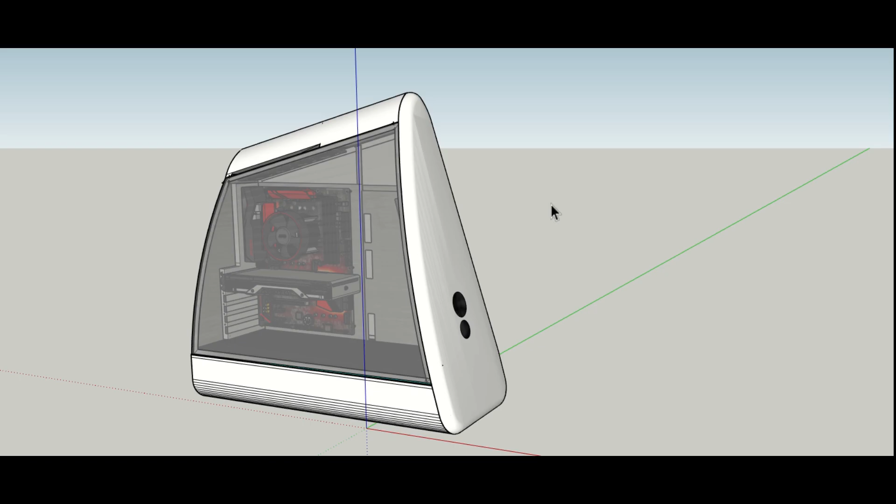But without further ado, let's get started. I've used SketchUp to create a 3D representation of the actual PC case, and here is the finished design. I'll just have a quick turn around to see the other side of the case. From what you can see it looks fairly simplistic, but creating it is going to be a lot more difficult than I realized.

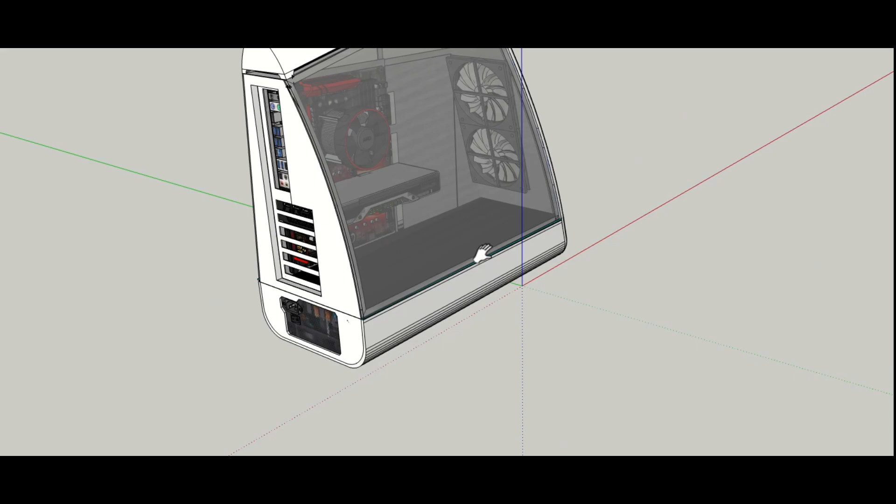So what I'll do is break it down and show you piece by piece how each individual piece connects together, and then finally you'll see the internal frame.

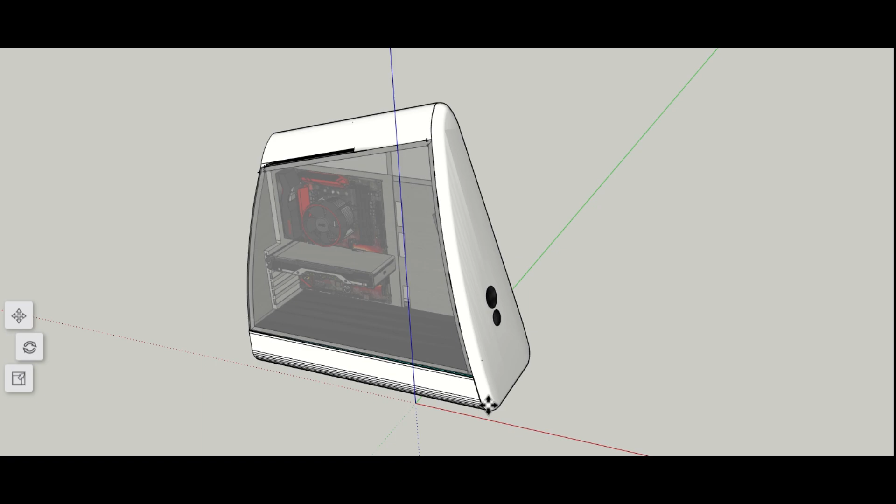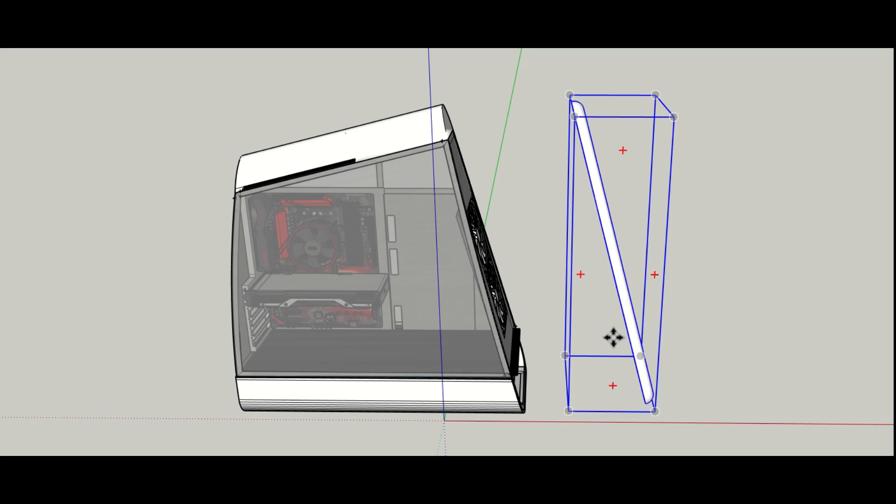I'll start off with the front. I'm still not 100% sure what I'm going to make it out of. Potentially I could fabricate it out of metal. I've seen quite a few YouTube videos on how they fabricate these things, and it looks fairly straightforward, but when it comes down to it, we'll have a look.

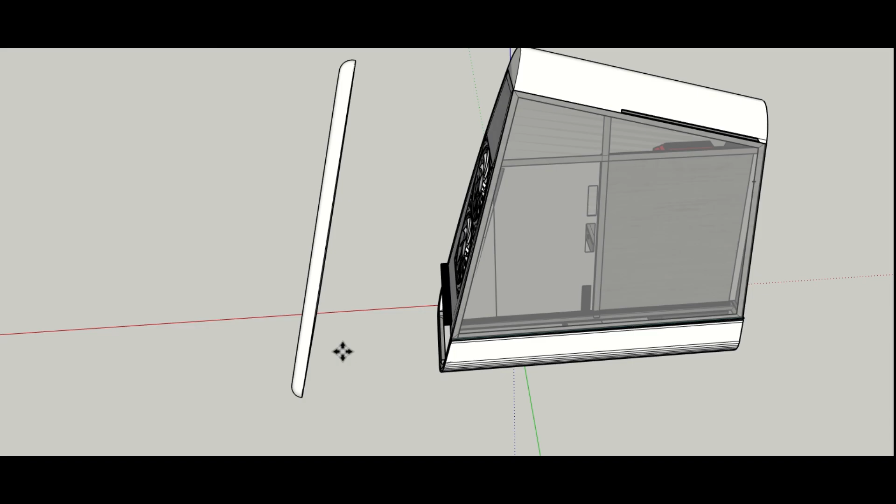The other option is acrylic or something similar, but to be honest my skill set's not that great anyway, and trying to learn a new skill in terms of curving an acrylic sheet to this kind of shape, I think it's going to prove quite difficult.

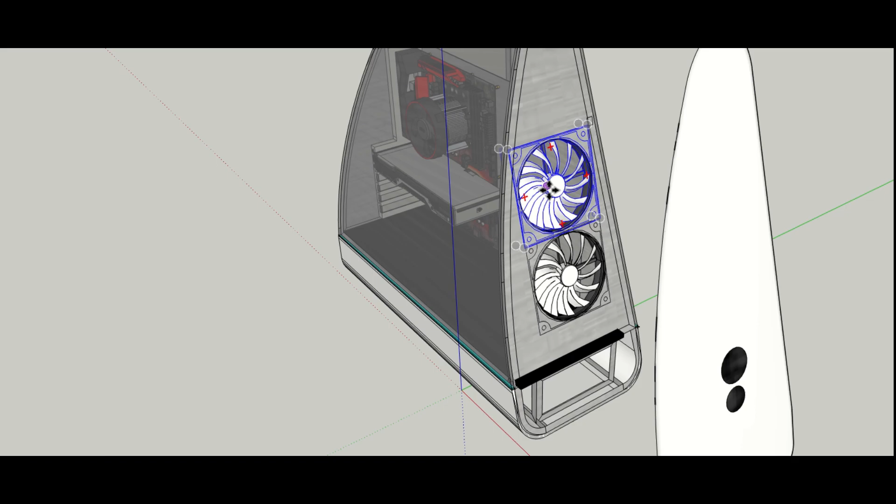By removing this, you can also see the two 120mm fans I put here at the moment. Potentially I could go up to 140. Depending, of course, if I decide to have a CPU cooler as well, then I might go for a 240 cooler and see how that looks.

But that's linked in with this metal frame and metal sheet over here that's going to be directly bolted onto the actual frame.

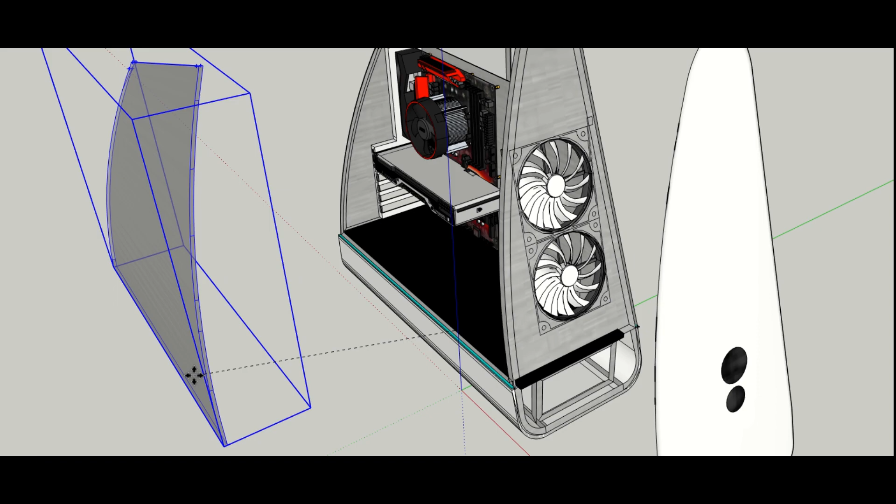The next piece is these side panels, and I think these are going to probably be easier to create out of acrylic, because I can probably bend them using heat into the shape of the actual frame by clamping them against it when I'm heating them up.

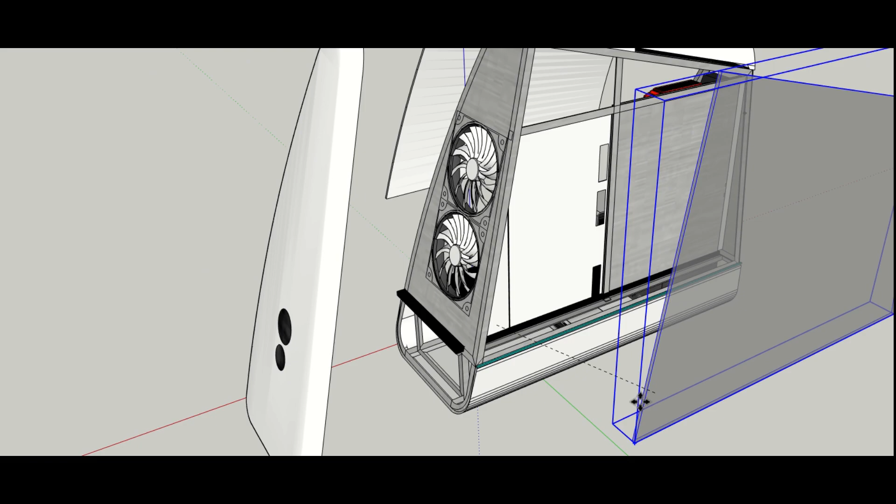Then we move on to the other side, and you can see the other frame, the other panel here. Again, this is just a straight piece, just cut into the shape, so that shouldn't be too difficult.

And then on the bottom you've also got the shroud that's going to cover the bottom of the actual case. Again, that's just going to be a curved piece of sheet metal, so that shouldn't be too difficult to fabricate.

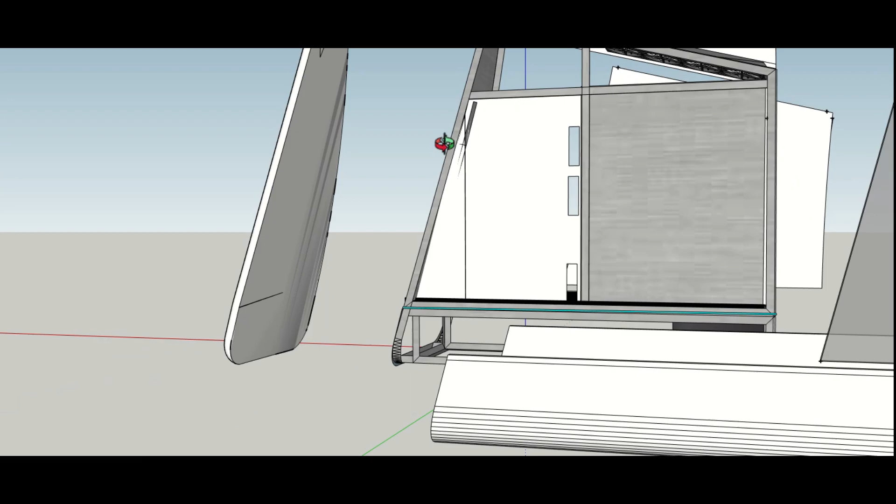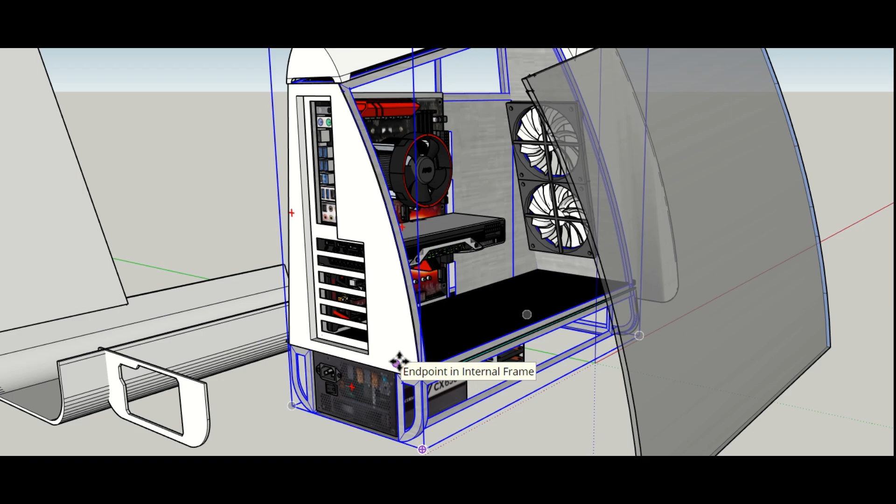Now at the back I've created two separate panels: one for the power supply unit, this one piece over here, and then at the top you've also got this plate for the IO connections and expansion slot for the motherboard tray. Finally you've also got this motherboard tray that comes out as well.

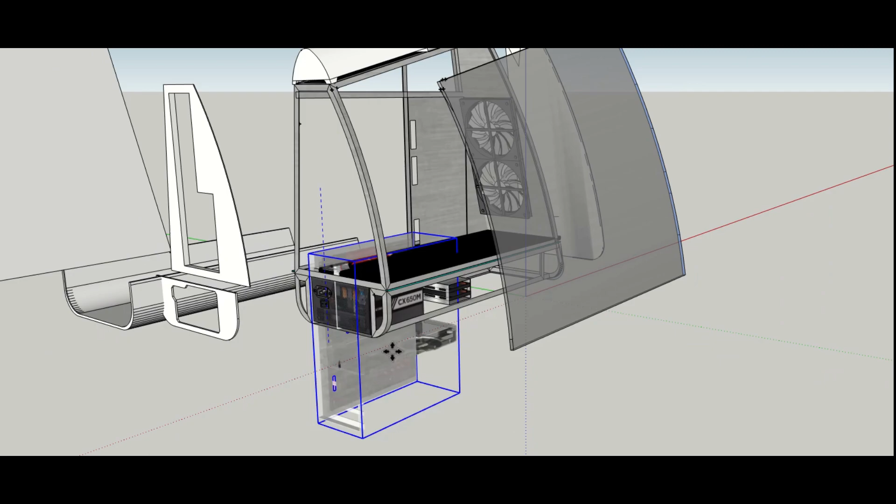If I just zoom out a bit, you can see this come out over here. It's not quite as detailed or as slick as what you would see for a Lian Li motherboard tray, but it'll do the job.

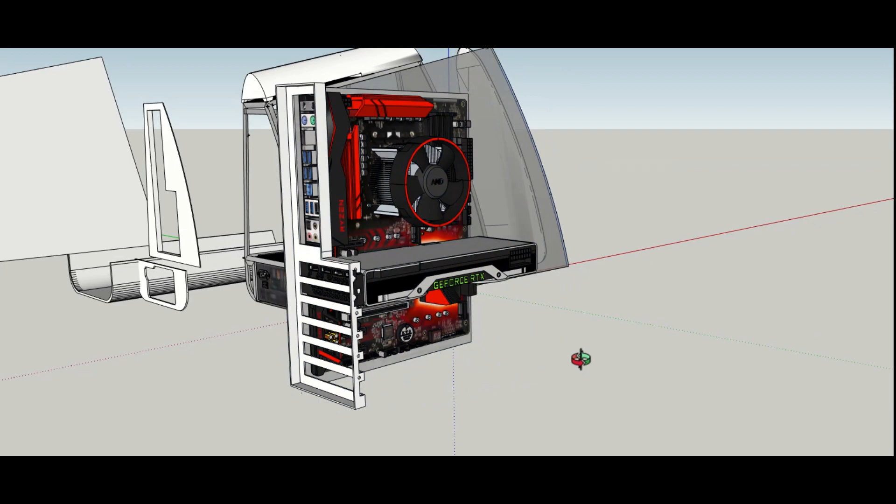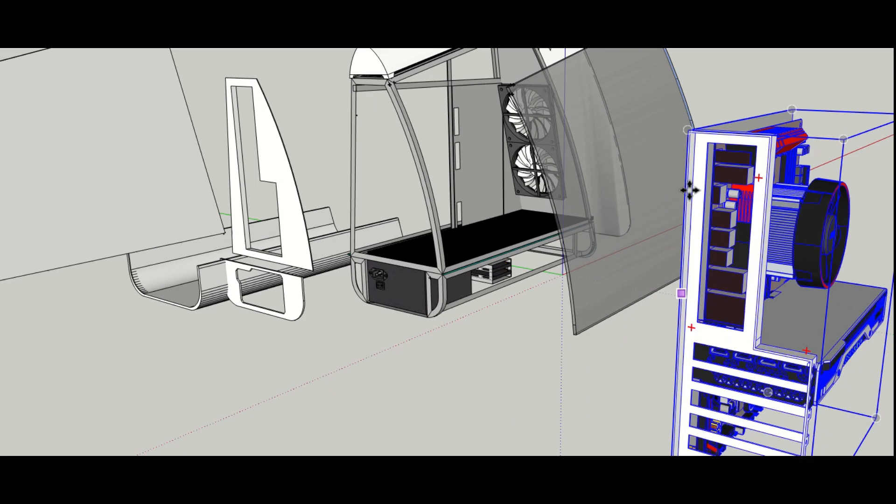And to be honest, this is probably going to be a bit difficult to create. What I'm thinking of doing is actually reusing an old PC case and cutting out the actual motherboard tray with the IO connection bit and the expansion slots. I'll have a little experiment, see if I can. It is fairly straightforward, but there's a lot more intricate little parts to it, so we'll see what happens.

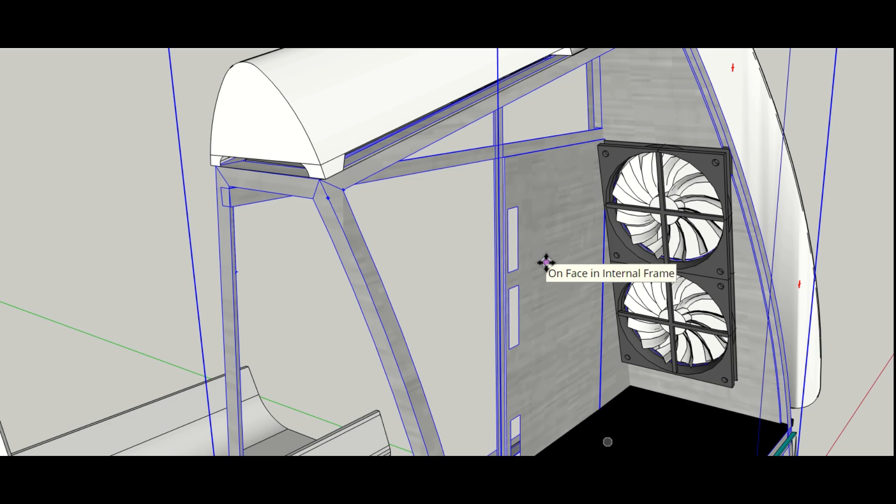That's connected to these mounting bars, one across horizontally, one across vertically. Then you've also got this cover plate, and that's really just to cover the wiring that's going to go behind.

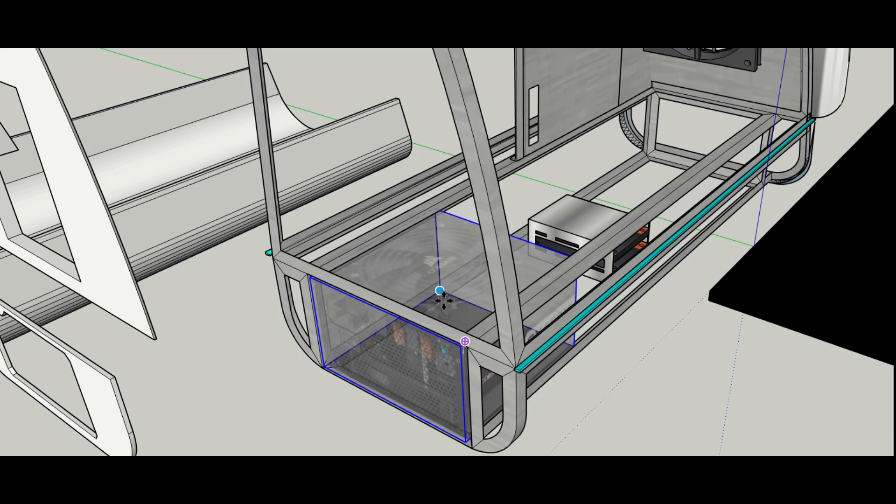I want to keep this looking as simple and as slick as possible. And at the bottom you've also got this cover plate that covers off the power supply unit. At the moment it's more than likely I'll have to have this turned upside down, so I can have the exhaust fan blowing down rather than up.

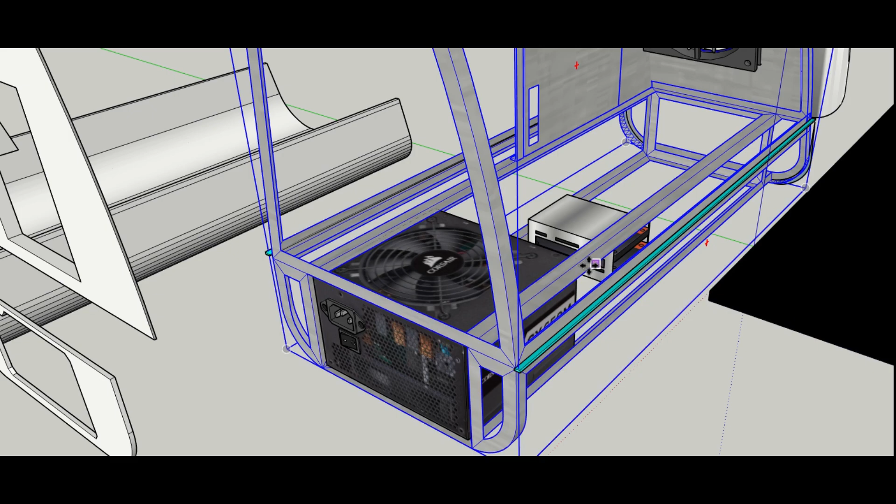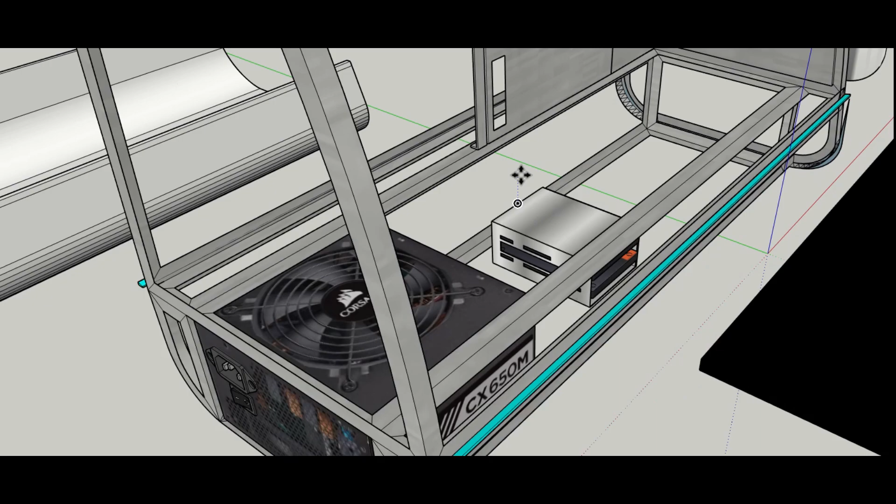Obviously, with this plate, I'd rather have it facing down. The other thing I could do is make a grill out of this plate and allow the air to be pushed up, but the problem is that would push directly onto the GPU, which I don't want. Finally at the bottom, you can see an SSD holder with two SSD drives. I'll probably not need more than two SSDs, whether 1 terabyte or 2 terabytes each, which should be more than enough for me.

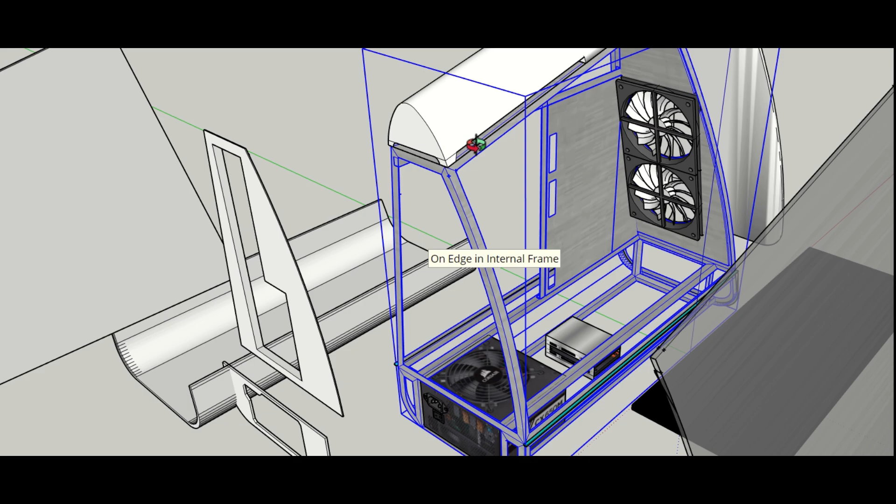And then finally, you can actually see the frame. Oh sorry, what I also forgot to show is the actual top bit. So if I just take that off...

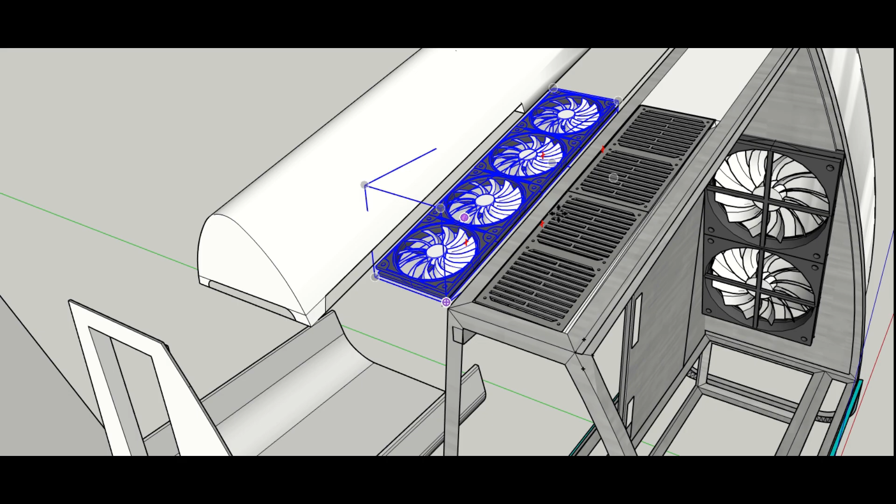You can see I've got four 60mm fans here. If I just take that off - these 60mm fans are going to act as the exhaust. On this top bit you've got air vents on both sides and the back, for the air to dissipate from these four 60mm fans.

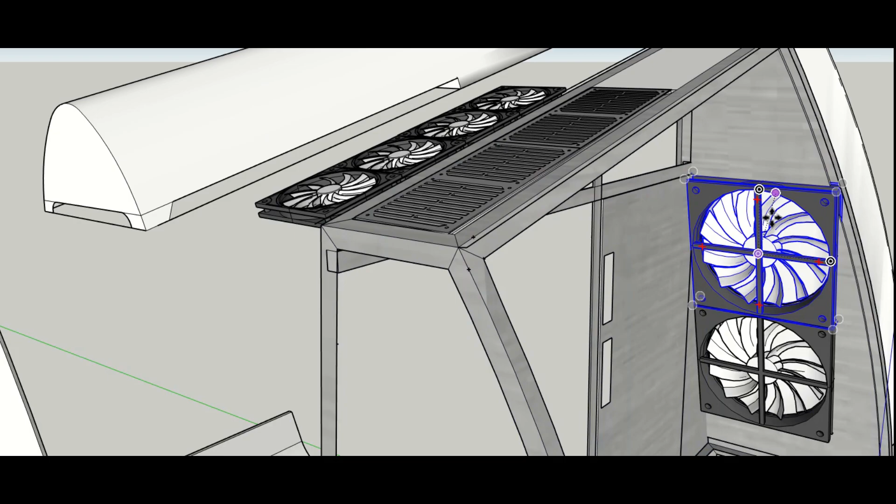So essentially, airflow will come from the front, from these two fans, pushing through the case towards the GPU and CPU, then pushing up, hopefully following the natural lines of heat dissipation anyway. That should hopefully work out quite nicely.

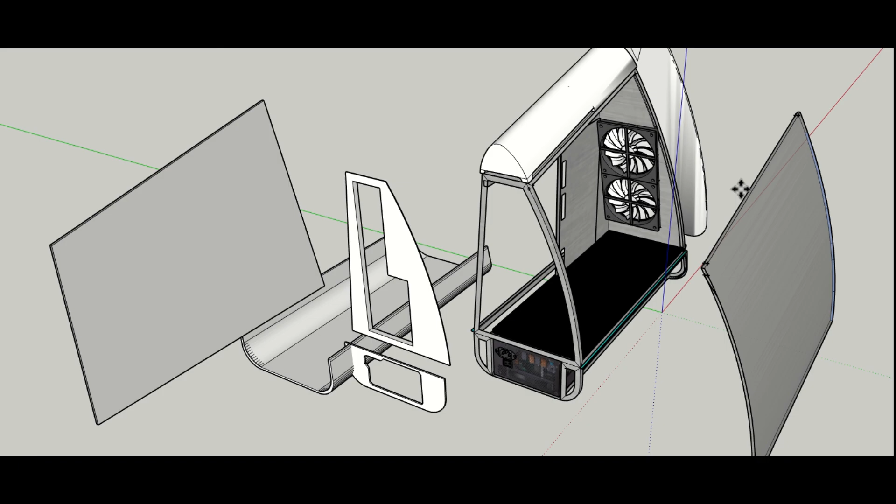Obviously, this is pretty much the end of the design stage. So in the next couple of weeks, I'm going to start going through the actual building of the case. I'll start off with the frame, and then I'll show how I build the frame, what kind of material I'm going to use, and what tools I'm going to use.

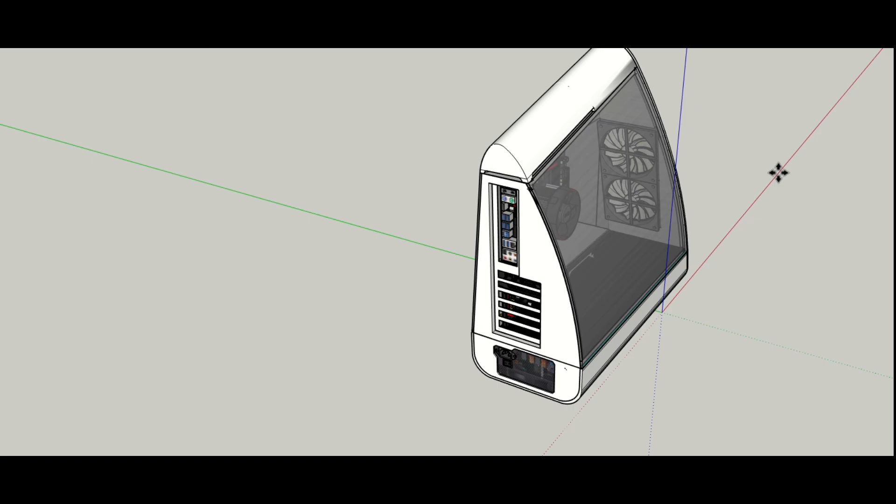From what you can see here, the frame is more than likely going to be created out of aluminium angle, and the bottom tray and bottom shroud will be created out of aluminium sheets. So will the back panels and the top. The side panels will be created out of acrylic, and the front - not 100% sure yet, but potentially aluminium sheets.

On the front, obviously you've just got the power button and the reset button, and then two LEDs for the hard drives and the power LED.

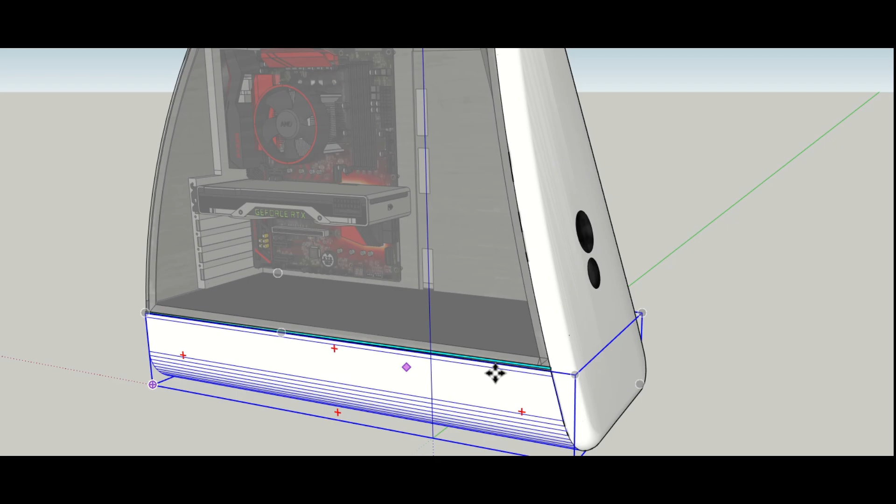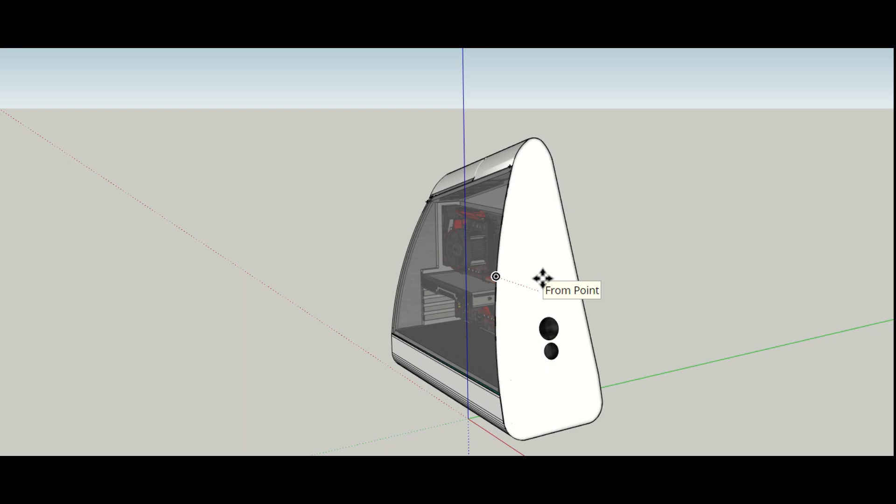I've also created little strips over here - I'm not sure if you can see it, they're not that great, but I've tried to add in some lighting. At the moment I haven't considered any RGB lighting at all, but it would be nice if I was able to create the front out of smoked white acrylic - then the two fans at the front could potentially be RGB, so you can see the light shine through slightly. But that's it really.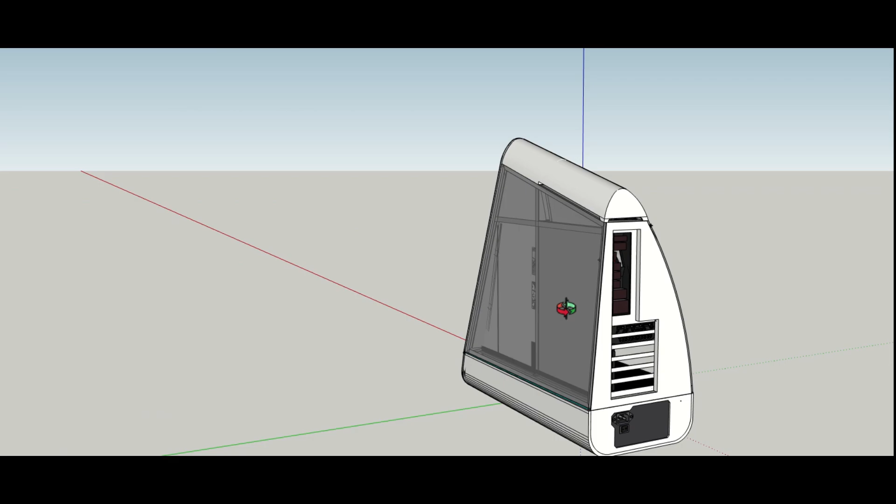That's the design. I'm hoping I can get it started in the next week or so. We'll see what happens. The hardware is not nailed down yet, so to be honest, this is still flexible.

I am leaning towards AMD. I'm not 100% sure, but they're doing a lot of great stuff. They're bringing a lot of new Ryzen chips that are rivaling, if not better than, Intel. I don't think Intel's doing much in terms of pushing their boundaries yet, and AMD is also cheaper. A lot of the motherboards look pretty decent in terms of their features too.

GPUs I haven't really thought about. There are so many coming out, and AMD is bringing out their own GPUs set to rival Nvidia, but we'll see what happens. The main thing for me at the moment is to focus on getting this PC case built, then test it out to see if it's sturdy enough and make sure everything's solid. Then we'll move on to the next stage.